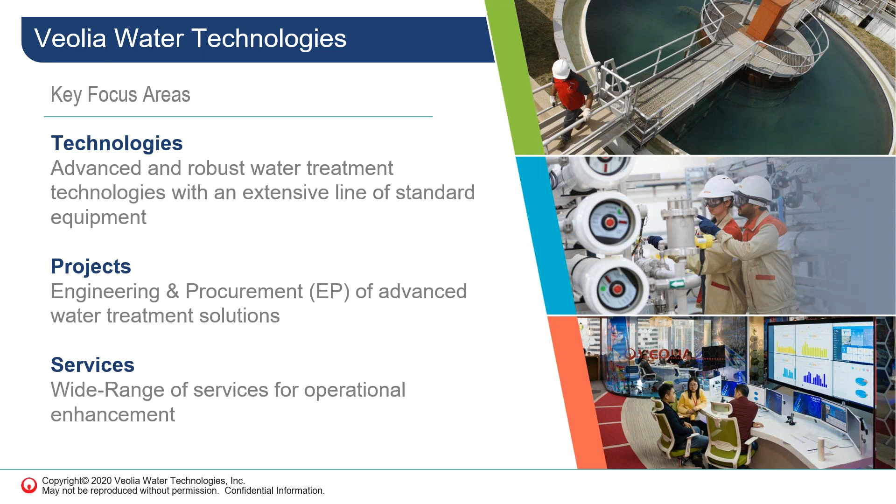Okay, so now I'd like to introduce our speakers for today. Jason Boomhour first joined Veolia as part of the instrumentation and equipment team after spending 3 years in the chemical piping sector. He quickly gravitated to the chemical and mechanical equipment product lines and led sales for Veolia's John Meunier pretreatment equipment in Ontario for 5 years. He is now working as part of the process sales team at Veolia Water Technologies Canadian office, covering all of Veolia's technologies for the municipal sector.

And we also have with us today Aurélien Polit. Aurélien is the equipment application and tenders team supervisor based in Veolia's Montreal office. With over 20 years of experience in mechanical engineering, Aurélien has 14 years of experience in the areas of municipal wastewater treatment. Aurélien joined Veolia in 2009 as an application specialist for the pre-treatment division and was appointed supervisor in 2015, where he oversees all equipment selections and tenders for North America. So with that, I would now like to turn it over to Jason. Jason, are you with us? Yes, I am. All right.

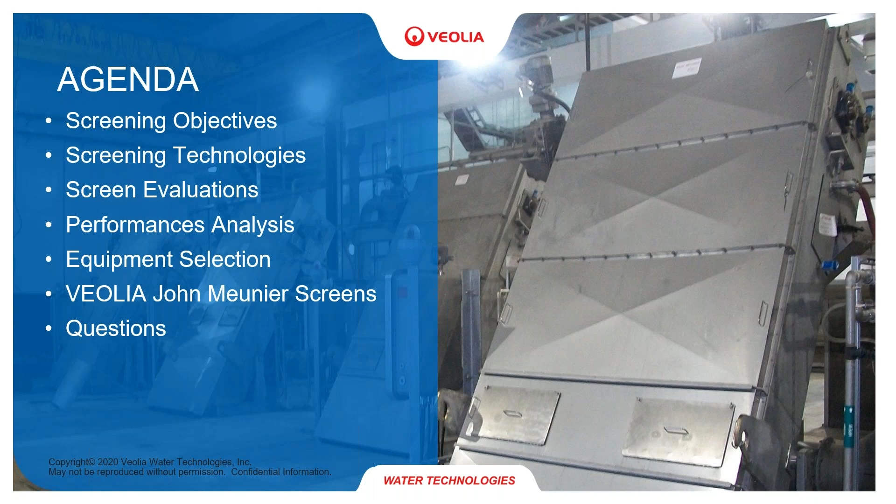Section 1, screening objectives. Design objectives for screening are to remove inert waste like plastic, glass, metal, hair, rocks, and fibrous material from the treatment process. Greater removal levels of these items will increase the reliability and longevity of downstream treatment equipment and address three main concerns. Number 1 is to protect the mechanical equipment.

The better the level of screening capture rate, the fewer pump clogs, mixer realignments, bearing replacements, and clogged membranes, sieves, and nozzles.

Number 2, to protect process-intensive technologies. It should be expected that energy consumption can be reduced as pumping, mixing, and aeration would all be more efficient when not fouled with hair, wipes, and fibers. And number 3, reduce operational expenditures. Overall, screening is an essential process to ensure the operations team does not spend the majority of their time or their budget maintaining fouled equipment.

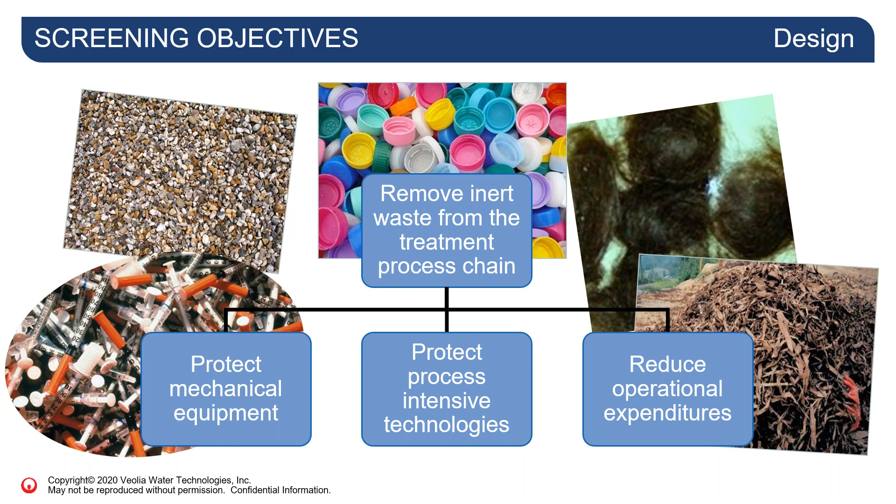An objective that is not always considered is the need to prepare for future regulations. As we have seen in the last decade, we are now municipally in an environment where tertiary treatment is nearly a standard. In addition, we are also seeing wastewater facilities enter into a phase of process intensification, where advanced technologies are being deployed in retrofit. These technologies, if they are IFAS, MABR, biological aerated filters, MBR, etc., all require high levels of screen capture.

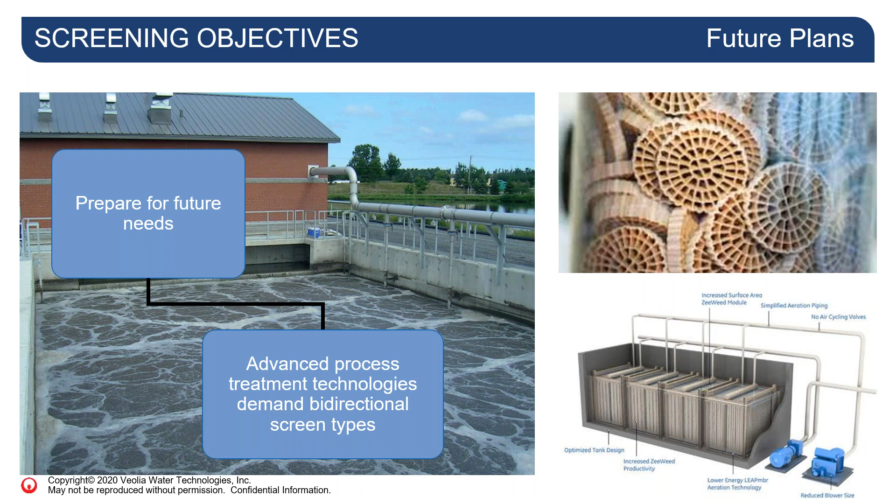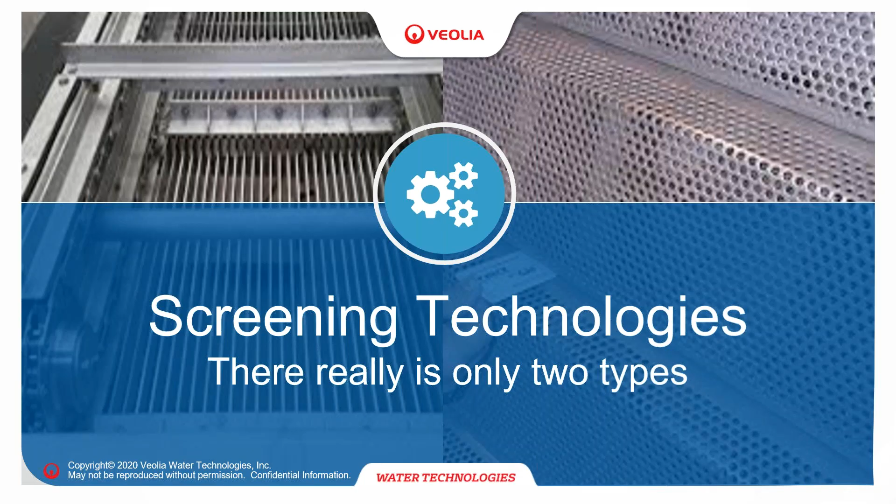Section 2, screening technologies. There are many screen technologies on the market that all seem so very different. However, we can simply divide them into two main categories to represent the primary way screens restrict flow.

On the left in our table, we see unidirectional screens, which are all bar types, wherein the spacing is represented by a horizontal measurement between two parallel bars. On the right, we see an example of bidirectional screens. These are all the perforated and mesh wire types, wherein the spacing is represented by the perforated hole's diameter.

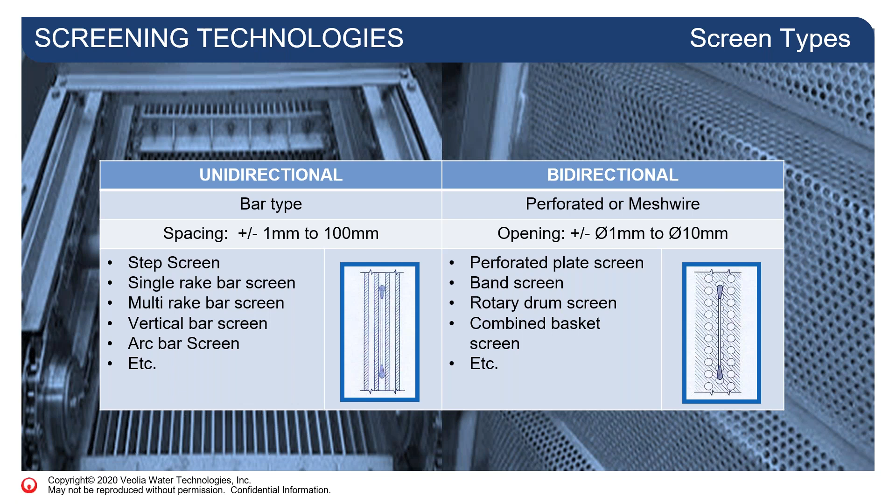The primary differentiating factor between bar and perforated type screens is the ability to capture debris. The diagram on the left shows a bar type screen. This type performs on one of three axes. Based on the bar screen's ability to restrict debris in one direction, we classify this type as unidirectional.

The diagram on the right shows a perforated type screen. This type can capture debris on two of three axes. Based on the perforation's ability to restrict debris in two directions, we classify this type as bidirectional.

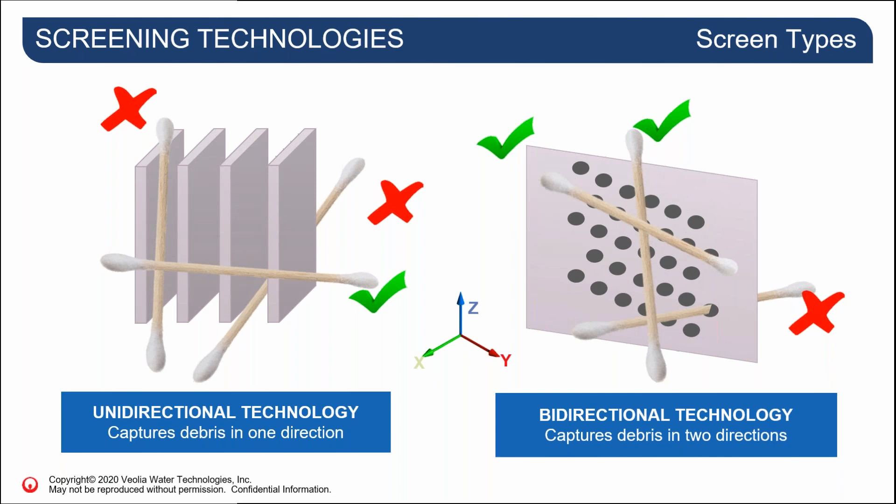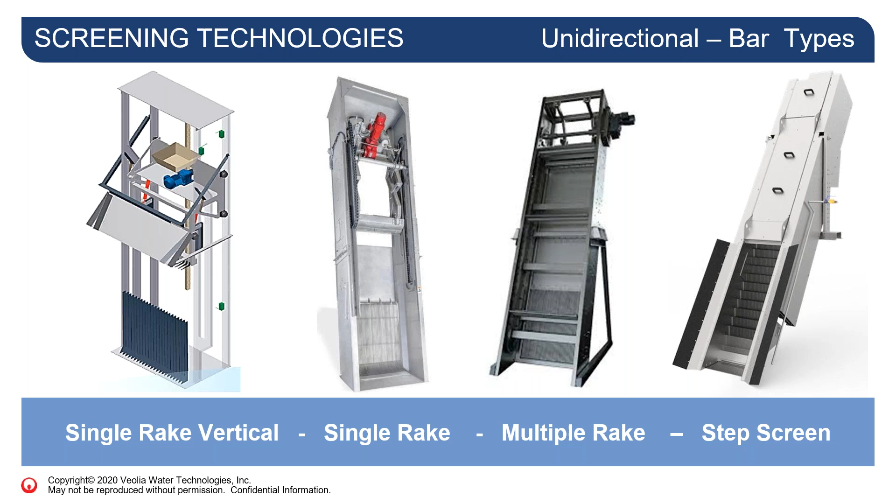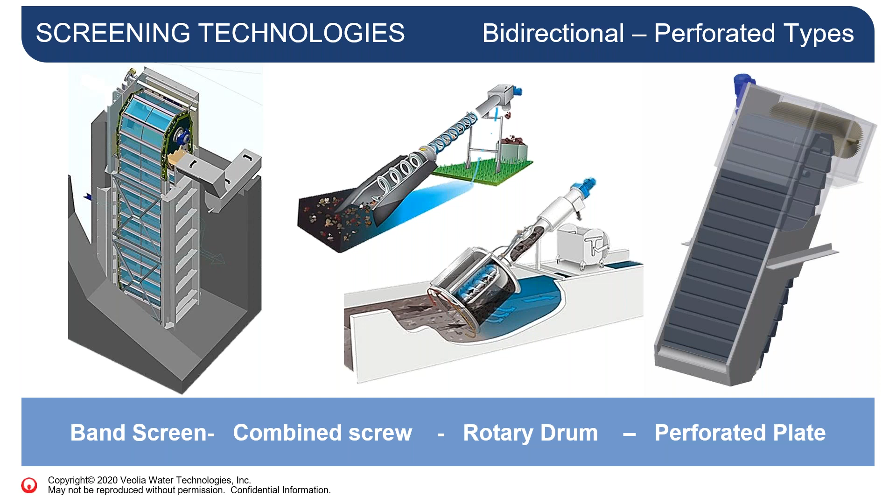This group of technologies are part of the perforated type or bidirectional screening family. This includes the water intake band screens, combined screw screens, rotary drums, and perforated plate fine screens. All these screens clean, transport, and discharge screenings differently, but share the common trait of perforations in their plates, drum, or basket. In contrast to bar type, these screens are heavier and more expensive due to the additional amount of steel required to provide a high level of restriction of the influent debris. In the following section, we will review third-party research covering the performance of the various screen types we reviewed previously.

The screen evaluations were conducted at the United Kingdom National Screen Evaluation Facility, a third-party research group who has tested 45 screens from 2000 to 2011. The process flow diagram on display shows the facility's controlled and repeatable test facility.

The objective of these studies was to evaluate the screenings capture ratio and head loss through a number of screens during both static and dynamic operating modes. The results of performance at both operating modes were combined to provide the screen's average screen capture rate.

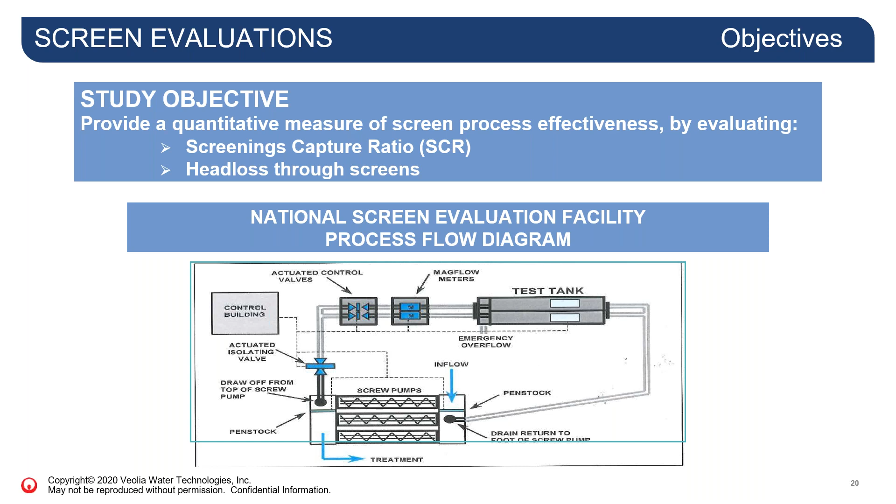The test protocol was designed as follows: 12 tests were performed on each screen. 6 were done in static mode - this is when the screen is turned on, then turned off, so kind of like a low flow event.

6 tests were done in dynamic mode, so when the screen is on, or a storm event.

To calculate the results, the team measured quantity X introduced into the inlet channel, quantity Y removed by the screen, and quantity Z that was able to bypass the screen and travel downstream. To assign a performance value to the screens, the teams used quantity Y divided by quantity X times 100% to devise a screen capture rate.

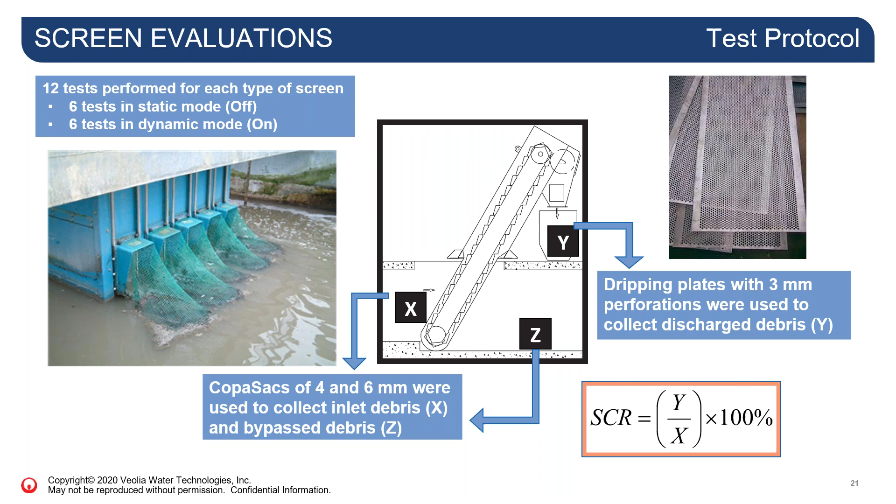Considering we know bar type capture debris on 1 of 3 axes, and perforated type on 2 of 3 axes, these numbers make sense. Looking a bit deeper, we see the bidirectional technologies with known quick cleaning cycles, tight sealing tolerances, and efficient debris transfer have an average screen capture rate of 70% or higher.

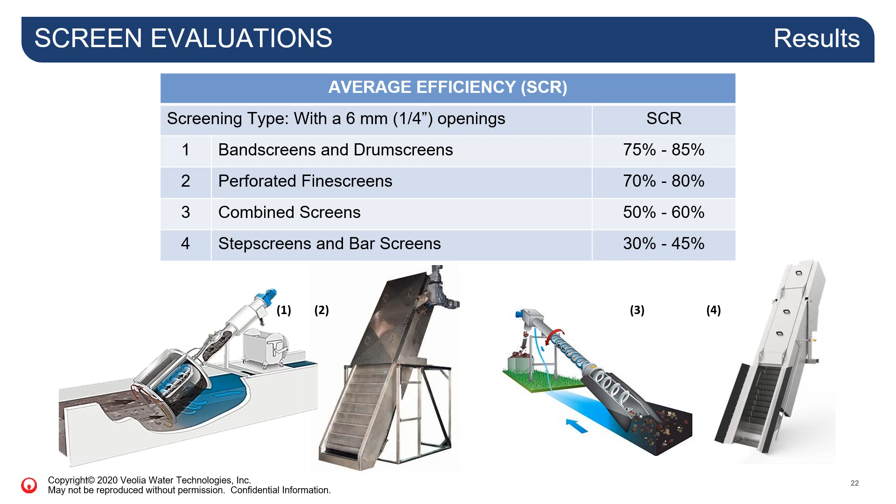In section 4, we will review how screens operate, how operation affects performance, and when a screen's performance is most vital.

The screen's performance was evaluated during 2 operation modes. Static mode, so like we know, this is when the screen is off. This happens during dry weather conditions and low flows. This is when the screen starts blinding due to debris accumulating, and the screen capture rate increases in relation to this blinding.

And then we have dynamic mode. This is when the screen is running continuously. This happens during higher flows and storm conditions. The screen is being continuously cleaned. The combination of these 2 tests will represent the actual automatic operation of the screen at different weather conditions.

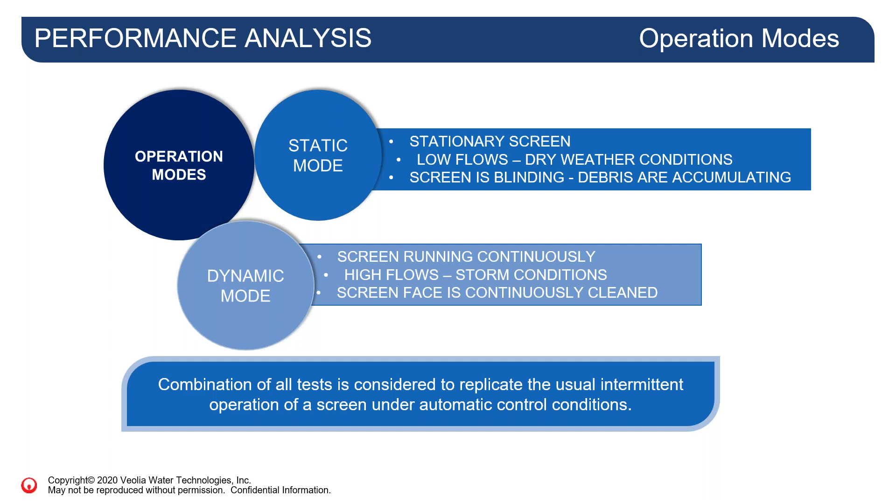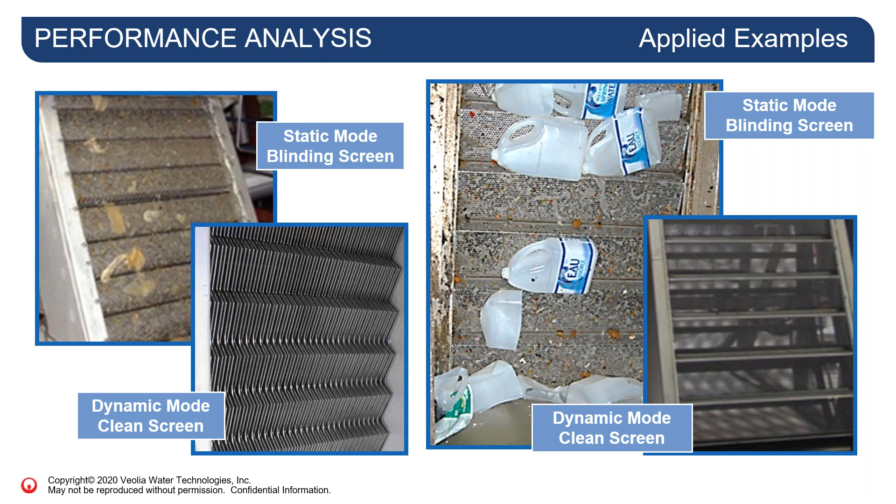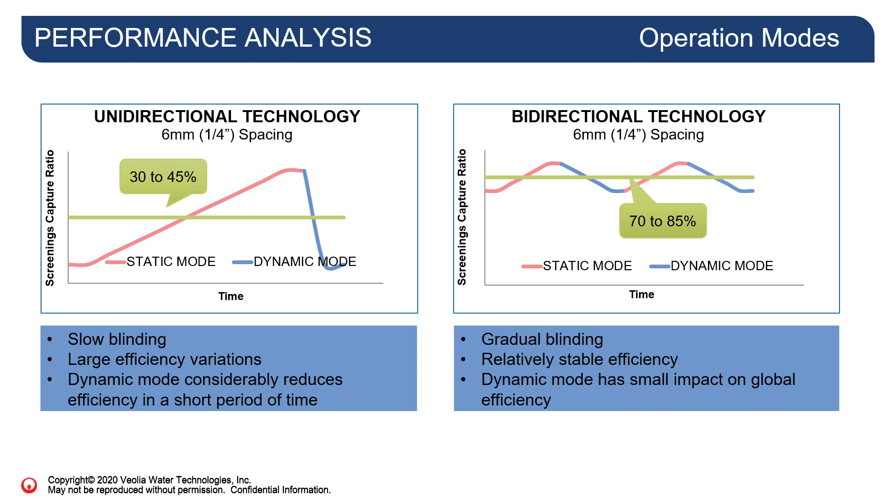The concept of fine screen has been used by manufacturers of advanced process technologies to call for a certain level of protection for their equipment. The typical spec for these technologies calls for perforated plate at 6 millimeters or less. Arguments are being made to identify fine screens as those with 6 millimeter or less spacing without limitation to the type of screen, due to the ability of blinding to increase efficiencies.

When manufacturers of advanced process technologies are looking at requirements to offer performance guarantee, we think of these two questions: When are screens needed the most? And does spacing equate to protection?

The most likely events to deliver high volumes of debris into a headworks system are first flush events. These events are experienced during the start of rainstorms and snow ice thaws. These are the type of events that deliver high flow rates and essentially clean out the sewer system by pushing all the settled debris into the headwork screen.

The high loading rate in these events causes the screen to initiate operation and be in dynamic mode for the majority of the event's worst conditions. When evaluating screens in these events, we must consider the screen's performance to beat its screen capture rating while in dynamic mode. With that in mind, we will always recommend bidirectional technologies to ensure high screen capture rate when protection of process is critical.

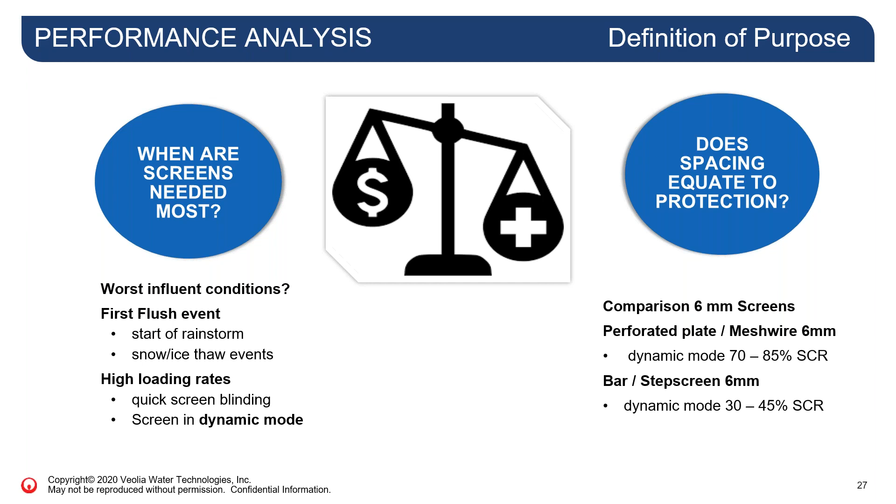Our recommendations so far: number one, the process treatment downstream will determine the screen type and opening size. In many facilities like lagoons and conventional activated sludge plants, a bar type screen is a suitable choice. Number two, the screen type selected should be based on the efficiencies required when the screen is in dynamic mode at peak flow rate. And number three, it is important to optimize the operating modes depending on the plant hydraulic flow conditions and the screen's technical limitations to withstand water differential, while also considering their cleaning speed.

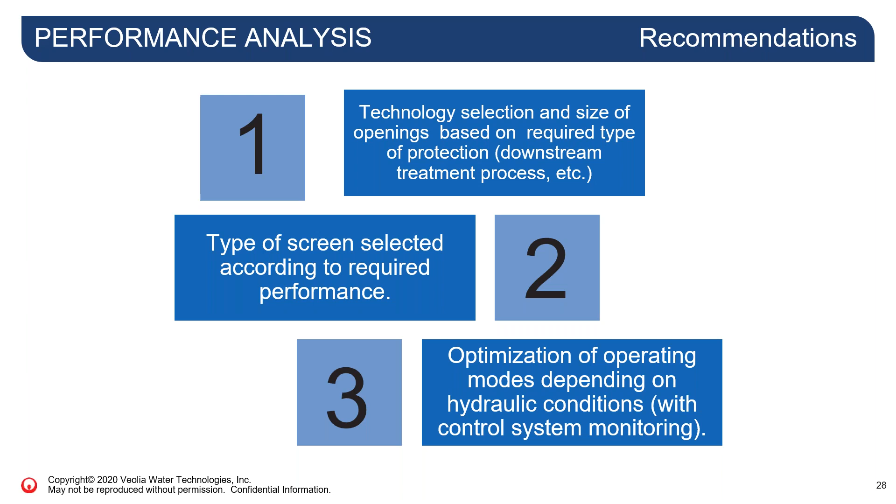In section 5, I will present on the basic principles of equipment selection and how it is a little more work selecting equipment for installation in existing sites as retrofit.

In the following slides, we will discuss the technical limitations and offer some insight into modification or add-ons that can help optimize the installation.

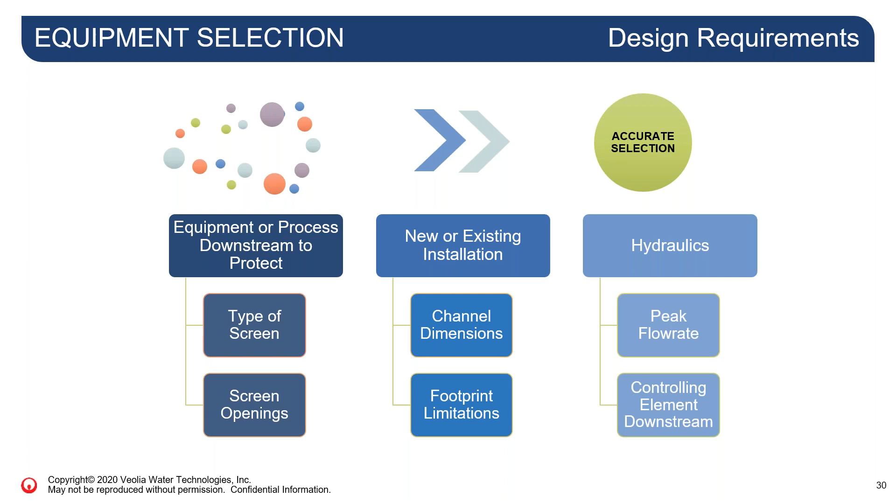There are three primary areas of concern when placing a screen in channel. Number one would be freeboard of 24 inches to allow for the advanced operation of screen modes. So you would want this if you're going to be doing some blinding to increase your efficiencies. You would want some play.

Number two, velocity through openings optimized for screen type to ensure screen performance. So bar type and perforated type all have a certain velocity that is ideal for the screen's operation. And number three, approach velocity to prevent settling of debris before it reaches the screen or push through debris at the screen.

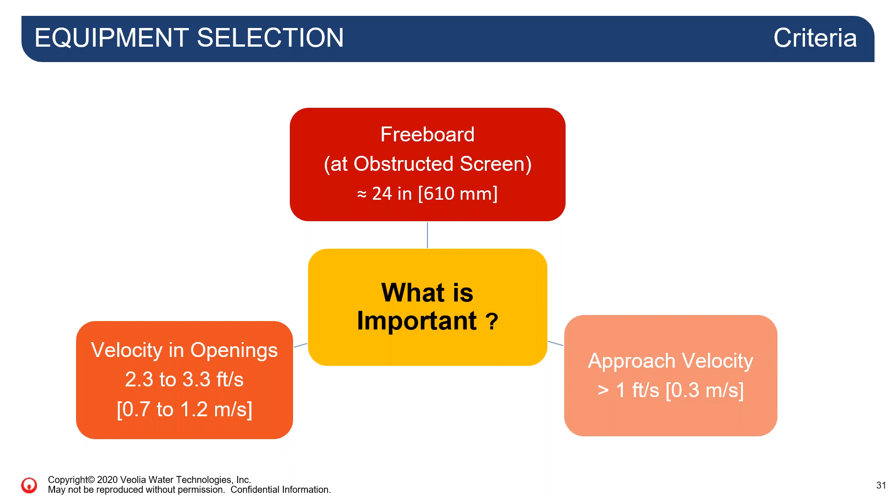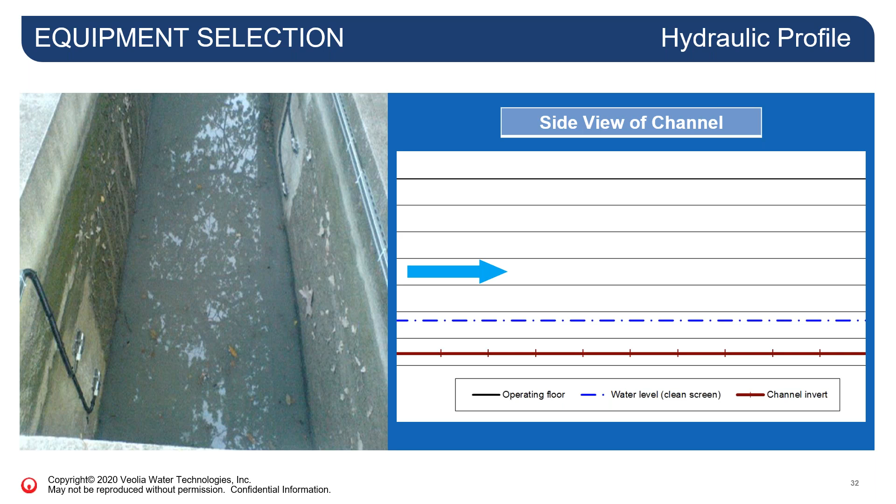By placing a screen in the channel, we introduce restrictions and increase head loss. This is now our best case scenario for hydraulics in the channel, but not our starting point to determine if the screen is feasible for the installation.

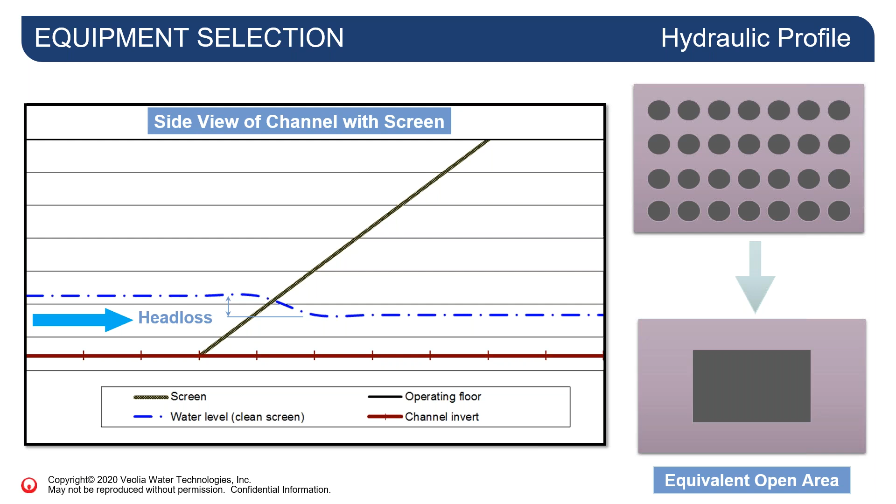In addition to the restrictions from the clean screen, hydraulics should be based on screens at 50% obstruction, further increasing head loss and reducing freeboard.

Introduction of the screen plus blinding now has increased head loss in the channel. To eliminate need for constant operation and potential failure, the appropriate freeboard of 24 inches at 50% obstruction should be considered. Ensuring this will allow operators the ability to increase efficiency of the screen by setting the cleaning cycles based on level differential without worry of flooding the channel.

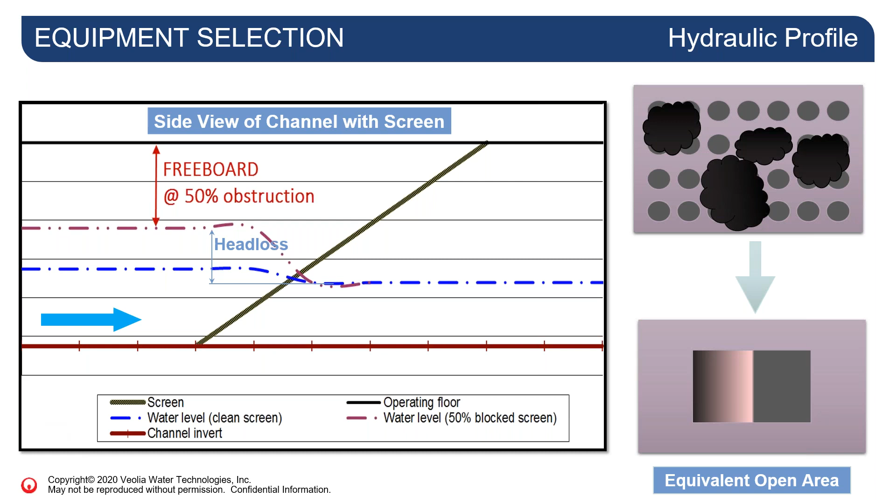When things don't set up perfectly, we can use various solutions to overcome limitations. These methods are useful, but they're not always able to solve major site constraints. For freeboard, we can curb channel walls for depth, recess the equipment, or widen the channels.

For approach velocity, we can use weirs, flumes, and velocity plates downstream to change water levels. Another option is to widen or narrow the channels. And for velocity through the openings, similar techniques as discussed above apply, with more major changes like changing flow rates or selecting different screen type or opening sizes may be required.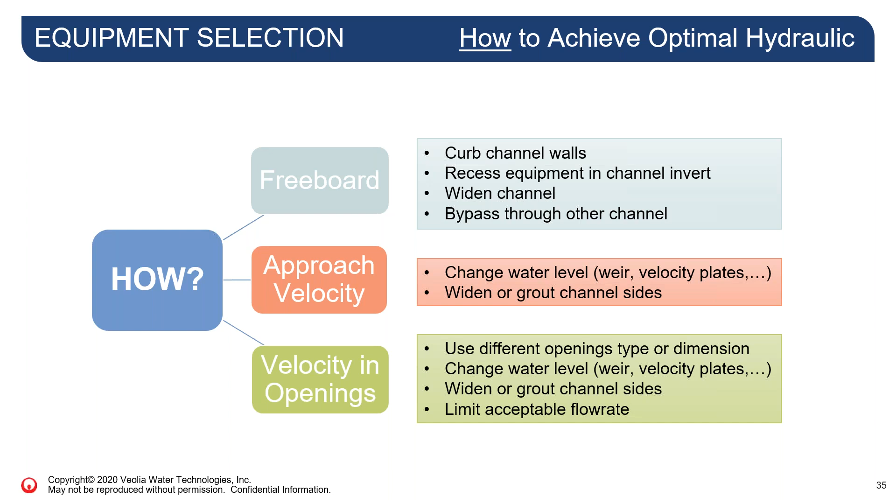Section 6, the John Meunier line of pretreatment equipment.

Veolia offers a full line of products to complete a pretreatment system with one vendor. In addition to screens, we carry a line of debris handling equipment, both single stage and multi-stage washer compactors, screw conveyors, and sluices.

The grit removal line is led by advanced systems that have reestablished performance for grit efficiency with Mectan V and the BioMectan. In addition to the standard pretreatment product line, we offer two models of combination type systems that provide screening, debris handling, and grit removal in one combined system.

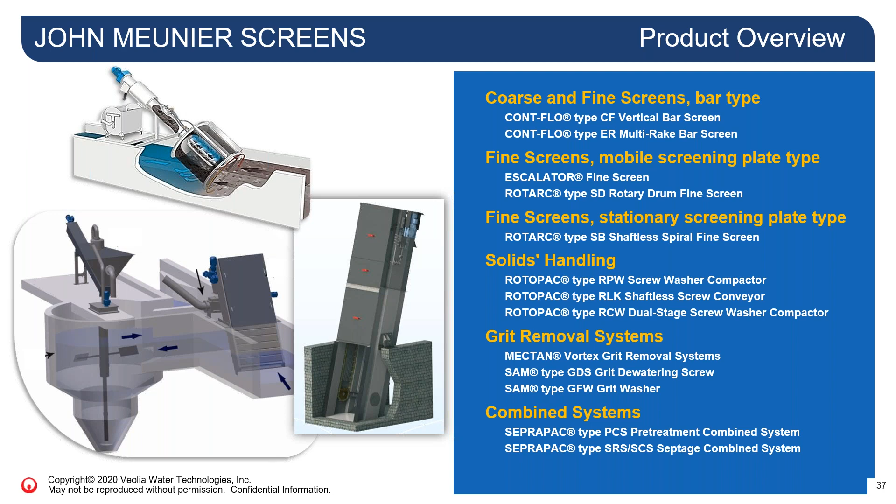Our first screen is the Cont-Flo. Cont-Flo is the original John Meunier bar screen and has been around since the 1980s. Decades of experience has proven the screen is durable, capable of handling the heaviest types of debris. Personally, I've been on site and seen this screen remove bicycles, strollers, sewer bricks, and even cinder blocks. The big advantage with Cont-Flo is the ability of the screen to knock back large objects from the bar rack.

This saves nuisance alarms overnight when debris gets lodged or is too awkward to be removed from channel. Think about something like a tree branch. In addition, with freestanding bars, the screen has built-in overflow. Essentially, we can stagger the bars to mimic a finger weir. These benefits are unique to Cont-Flo and the back clean method of cleaning a bar rack.

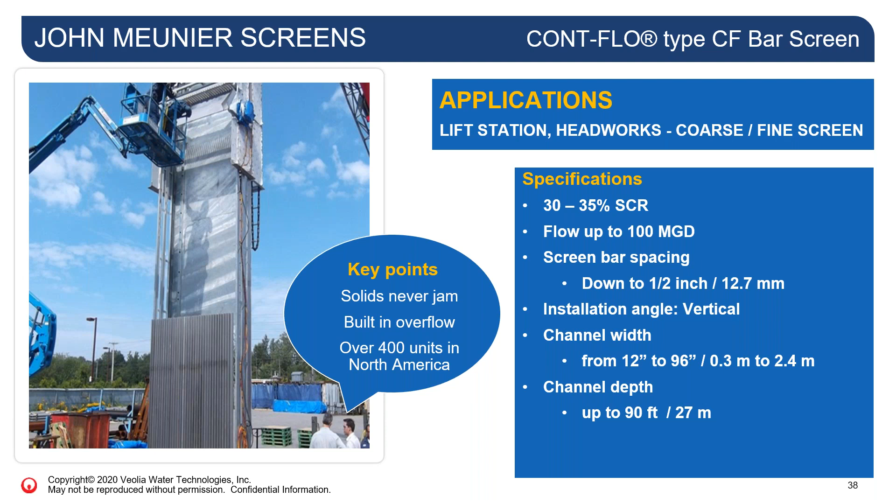In comparison to the Cont-Flo Classic, the ER is a fairly recent addition coming into the product line in the early 2000s. The product addresses well the need of smaller towns and provides good screening removal for conventional activated sludge plants. With 6mm spacing and multiple rakes, the screen provides operators with a nice combination of coarse and fine screening when operating in static mode. Key features of the ER would be low headroom, low head loss, and 6mm bar spacings.

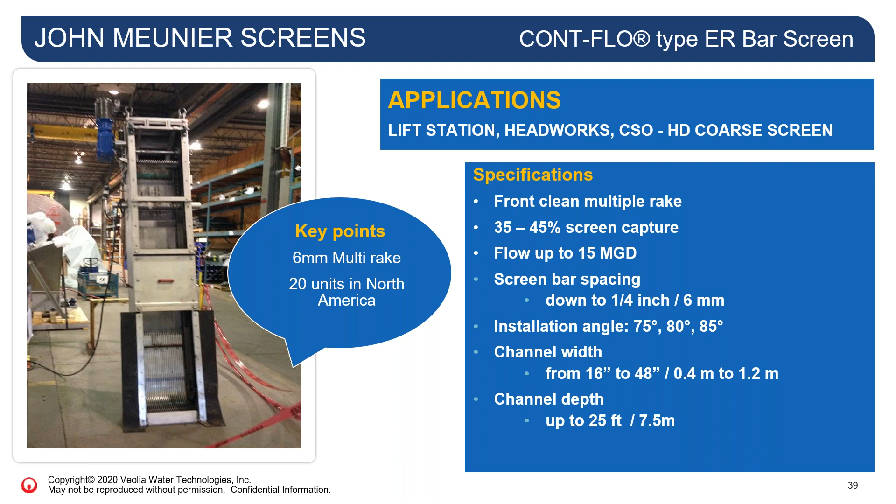The escalator has been in our product line since the 1990s. In the mid-2000s, we introduced an innovation to the brush system that extended brush life 2 to 3 years and increased efficiency on the equipment. With capacities of up to 100 mgd and a screen capture rate of 79%, the escalator is a reliable technology for most any application in municipal wastewater.

Some key points for the escalator are perforated plates with a shelf design for larger solids lift capabilities. We've seen earlier one of the pictures where we were removing windshield washer fluid bottles. With industry-leading tight tolerances and sealing, such as double width foot brushes, neoprene side seals, and solid pins and bushings in our chain, the advanced cleaning system incorporates a self-tensioning cleaning brush and internal spray bar for fats, oils, and grease removal from the plates.

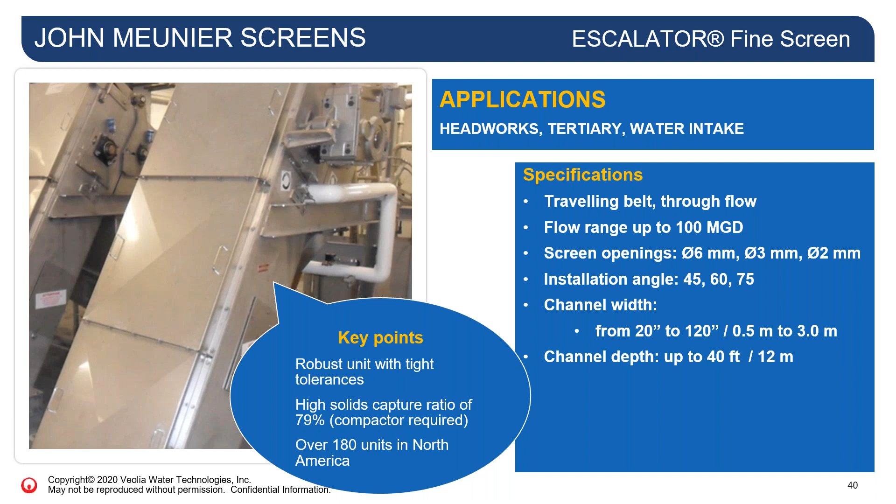The ROTARC SB is a versatile unit that sees work in standard municipal installations, along with septic receiving stations and vertical installs in manholes. These units provide screening, transfer, and compaction from one unit. Options are available to add a press zone to get up to 40% dry solids at the discharge, additional spray wash to get up to 90% removal of organics, and a continuous bagging system for odor control.

These units can be placed in a concrete channel. We can also place them in self-standing stainless steel tanks.

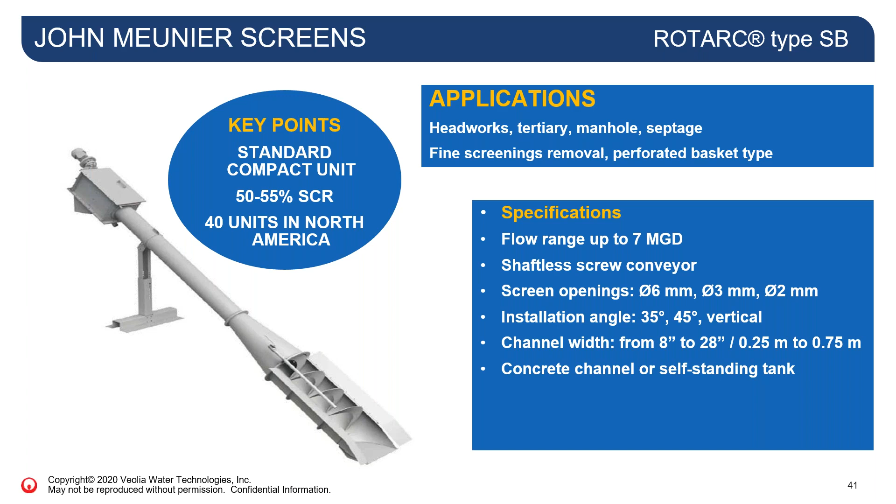The ROTARC SD is a choice when addressing downstream processes that require capture rates of 80% or greater at large flows.

Typical installations for rotary drums are as pre-treatment to an MBR system, where 3mm or less perforations are required. In addition to the high level of screening removal, the ROTARC SD also provides compaction up to 40% dry solids at the discharge, a wash system to provide up to 80% organics removal, and, similar to the ROTARC SB, a bagging system for odor control improvement. And again, this screen can also be placed in channel or in a self-standing stainless steel tank.

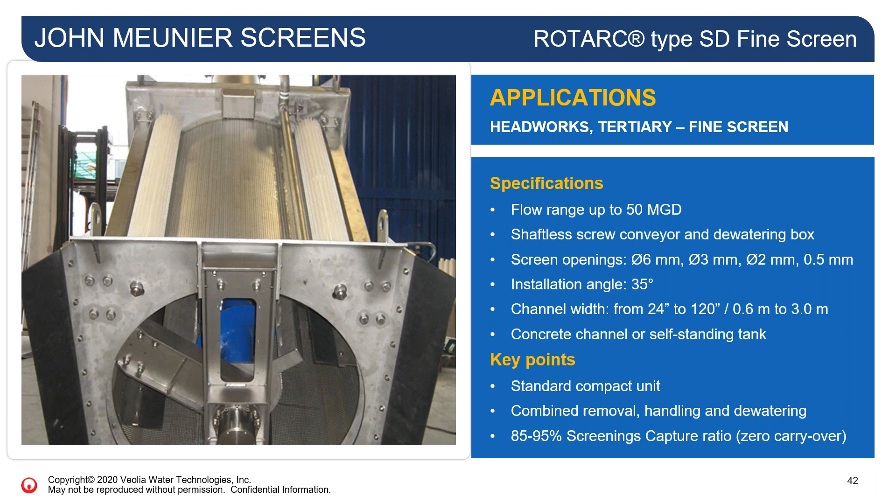For those who are not aware, the John Meunier MECTAN V and Biomectan are highly advanced vortex grit removal systems. The team has innovated these systems to produce better grit removal on the fine scale of grit particles, increased organic separation, and overcame rigid inlet-outlet configurations to produce a variable angle outlet for optimal installation flexibility.

In addition, both screens and vortex grit systems are sized for peak flow, but as we know with screens, the lower daily average flows allow for increased efficiency. For screens, the lower flows allow for blinding, but with vortex grit, it's about residence time for particles in the tank to settle. So with low flows, efficiency climbs. When the John Meunier Escalator, for example, is paired with a Mectan V or Biomectan, the headwork system is unmatched by any single vendor for high-level downstream protection at peak and daily average flows.

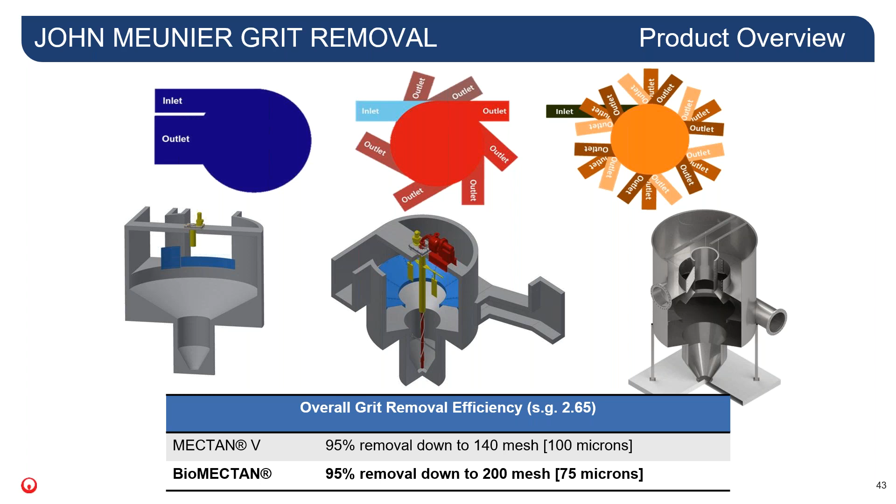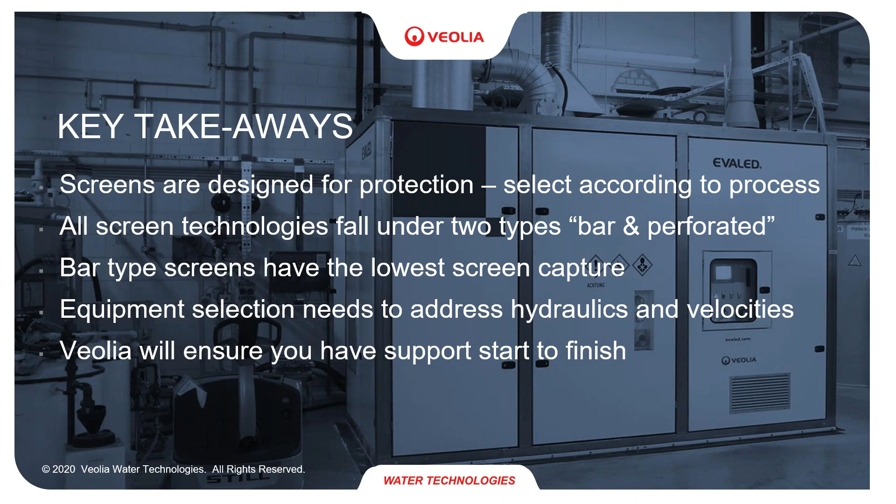To summarize the presentation, I hope some of the key takeaways will be that the screens are designed for protection, and they should be chosen according to the process that they're going to protect. All screen technologies fall under two types: bar types and perforated type screens. The bar type screens have the lowest screen capture rate. And the equipment selection needs to address not just hydraulics and velocities, but also the required screen type for the process. And when it comes down to it, Veolia will ensure you have support from the design to the installation portion of your project and beyond.